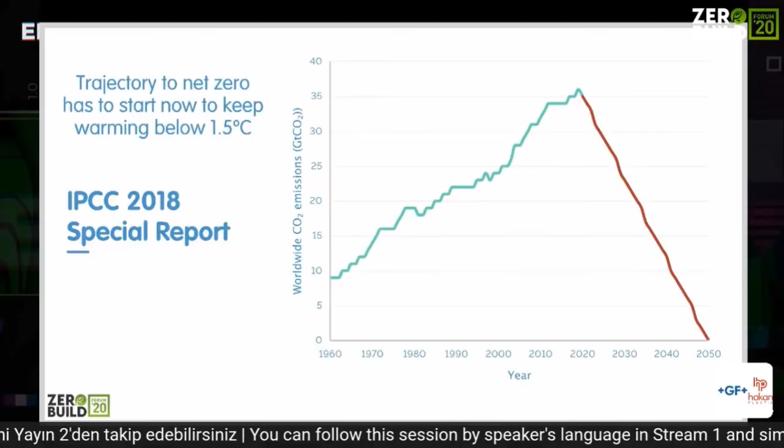So we need to be taking action right now to reduce emissions, rather than planning for things that might happen in 5 or 10 years' time and might help us reduce. We need to be reducing now, and we need to do what we know now is going to work. So that's my key takeaway from that graph.

I also wanted to point out that emissions from buildings generally fall into 2 broad categories: either operational emissions or embodied emissions. I'm sure most people are familiar with this, but just to clarify, the embodied emissions happen at the construction stage of the building, and also at certain points with maintenance and repair cycles during the lifetime of the building, and at the end. So on this chart there, the blue areas.

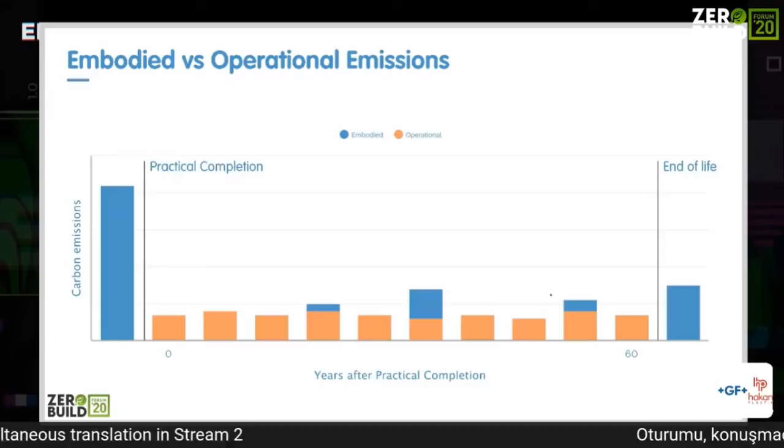Whereas the operational emissions occur during the lifetime of the building, and they're the emissions associated with heating, hot water, electricity use, etc. Today I'm going to be talking predominantly about operational emissions, because that's what Passivhaus focuses on, and that's also traditionally been the largest part of our emissions from buildings. But that's not to say that embodied emissions aren't also extremely important, because we need to get both down to zero if we're going to get to net zero.

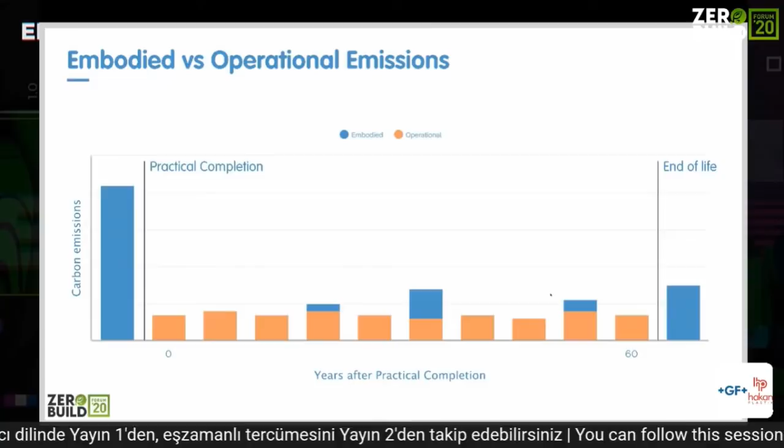And as we reduce our operational emissions, embodied becomes more important. But they are complementary. You can do them both. One doesn't necessarily impact the other, and they need different types of consideration. So today I'll be talking about operational emissions.

So how do buildings fit into the overall picture? Buildings account for nearly 40% of the world's emissions. And then you can see there that worldwide, the biggest chunk of that is in operational energy or operational emissions. So if we can deal with part of that, then we've done our bit to get to net zero.

And I just wanted to put this up. You probably won't be able to read the detail, but this is very similar to the UK's pattern, and it's just to emphasize that there are mostly fossil fuel sources used in Turkey. And then if you trace those through, you can see the oil products, the gas and the electricity products. If you trace them through to the residential section down here, you can see that the majority of the energy used in Turkish residential buildings uses gas, oil and electricity as the energy sources.

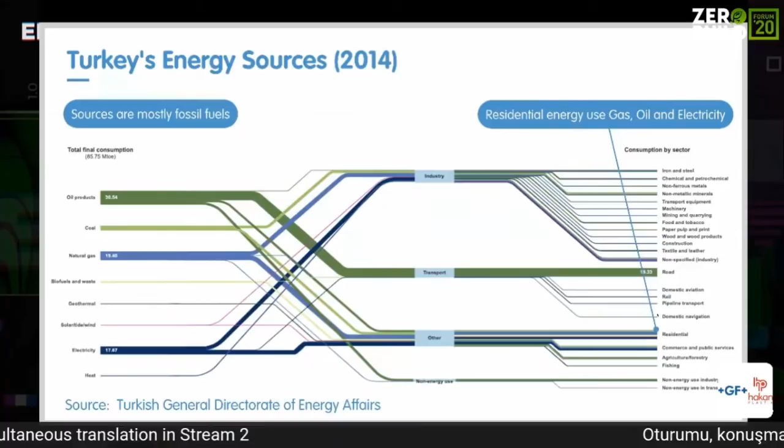And similar to the UK, gas and oil are used for heating and hot water due to the fact that they're very efficient for doing that. But that's the challenge we've got to start with. The mix of energy that we've got right now, both in the UK and in Turkey, is sourced from a lot of fossil fuels. So that is the big picture.

Now I'd like to spend just a few minutes talking about Passivhaus itself. Some of you may have heard of it, some not. And there are also maybe some misconceptions because people think that Passivhaus is something that perhaps it's not. So what is Passivhaus? Well, I'm going to talk about all these different sections: the energy balance in a building, the criteria that are associated with Passivhaus, what Passivhaus does for health and comfort, quality assurance, and how much it costs. So let's start with energy balance.

And this is a very simple but very powerful analogy. So if you have got a traditional coffee pot, which sits on a hot plate, then that will keep your coffee at the right temperature. But it is constantly pumping energy through that coffee pot to do that. So it's using a lot of energy. If you've got a very well insulated flask, that will also keep your coffee at the right temperature, but it's using no energy at all, or very little energy in some cases.

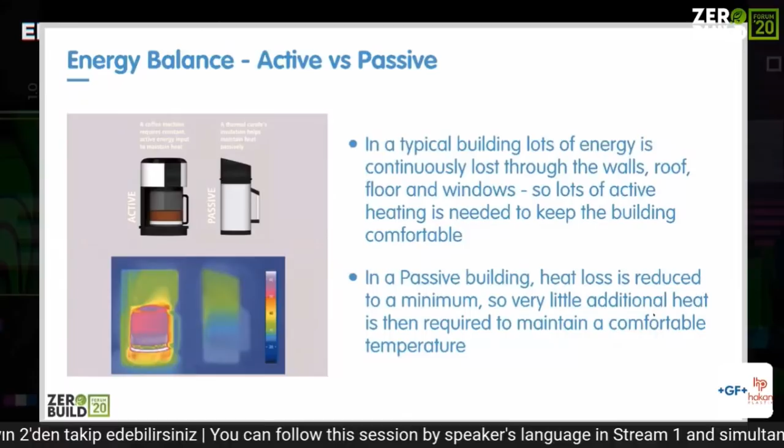So that is basically the principle of a Passivhaus. You put the energy in and keep the energy in rather than let the energy leak out. And of course, that is done in the main by improving the fabric, improving the bits of your building that are in contact with the outside world.

In a typical UK home, and I couldn't find directly equivalent data for Turkey, but I think it's probably quite similar. You can see that on the left-hand side of the screen here, you've got the ways that we can lose energy through a building. So through the roof, through ventilation, through windows and doors, through walls. So that's the way we can lose energy.

On the other side, we've got ways we can gain energy. So we can gain energy through windows, through the solar gain, and internal gains. And those are what we do by living in the house, cooking, washing, and just our metabolic rates within the building. And then you can see that this large pinkish bit here is the gap, effectively. These two columns have to balance.

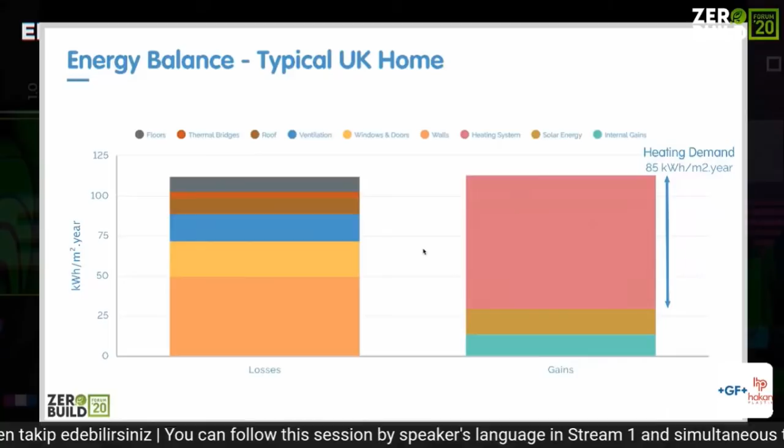And if they don't balance, if this one, the gains, is smaller than the losses, then your building will start to cool down. It will start to get cold. So the pink area is how much we need our heating system to deliver. And you can see here that for the UK, that gap for a new build home is around about 85 kilowatt hours per meter squared per year.

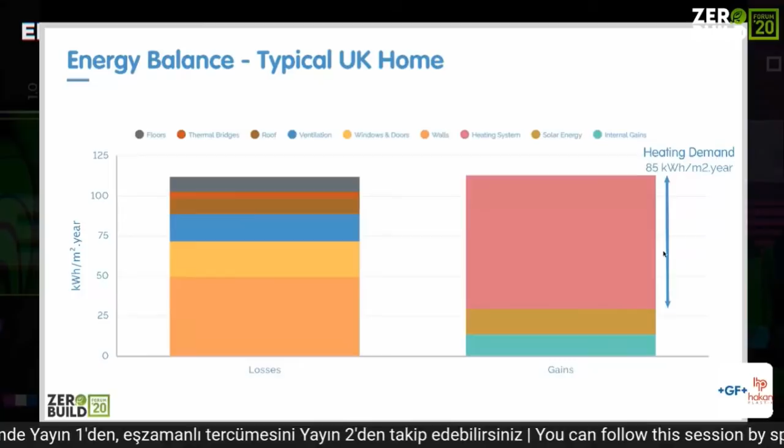It's probably worth me just explaining. I'm sure most of you will be very familiar with kilowatts and kilowatt hours, but there might be some who aren't, and I'm going to use these phrases a lot during the presentation. So it's all about energy and power. So if we start off with power, it's measured in watts or kilowatts or terawatts. And it's an instantaneous measurement.

So if you think of it like water, it's the rate at which water is flowing through a tap or a hose pipe or something. So that's power, and you measure it, and then the next second it might change, and it might change again. So I might have a light bulb, which is 100 watts. And so that means instantaneously it's putting out 100 watts of energy in the form of light and heat.

Watt hours or kilowatt hours or terawatt hours is energy. And what that is, is power but with a time function, which means if I left my 100-watt light bulb on for 1 hour, that would be 100 watt hours. If I had a 1 kilowatt kettle and I left it on for an hour, it's 1 kilowatt hour. So it's a measure of an amount of energy.

So if I go back to water, power is the rate of flow of water. Energy is how much water you might have in a bucket or a glass. So kilowatts and kilowatt hours are power and energy. So what we've measured here is the amount of energy over the course of a year, and we also tend to measure it per meter squared of a building. And what that means is we can compare different sizes of buildings.

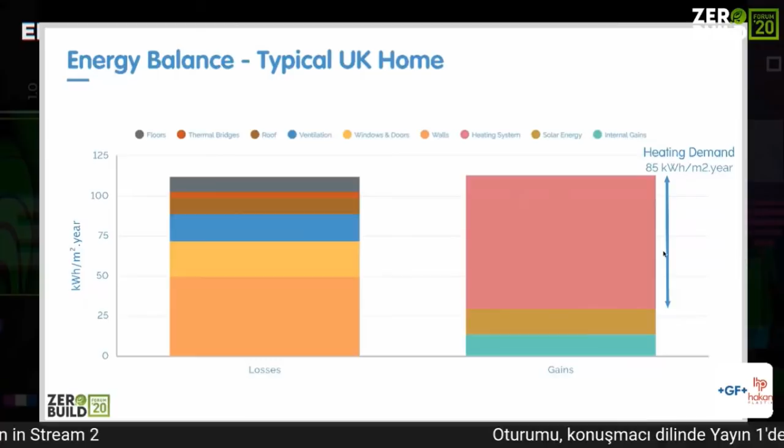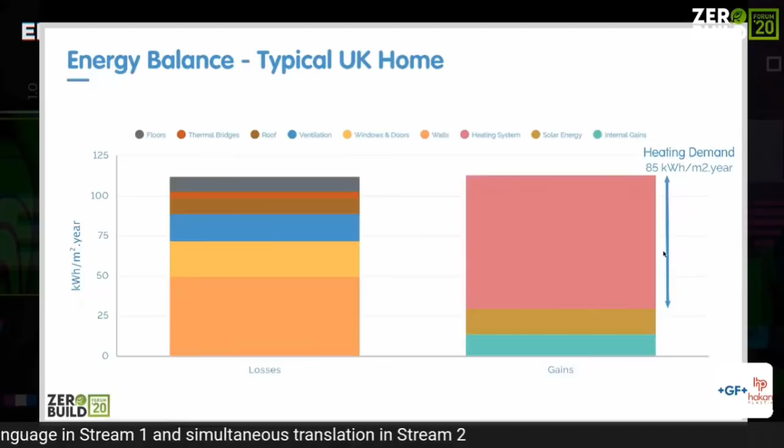So a small building and a large building, very difficult to compare the amount of energy they use overall, because the bigger one obviously will use more. But if we reduce it to per meter squared of the building, then we can compare all different types of buildings and different sizes of buildings. So in the UK, around 85 is what our new build systems have to deliver. Existing buildings, the buildings that are already built, it'll be a lot more.

So what does Passivhaus do? Well, Passivhaus comes along and really focuses on that left-hand side of the chart, on all our losses. What it does is it squashes those down. So more insulation, better ventilation, better windows, no thermal bridges. I'll explain those in a moment. So that really gets squashed down.

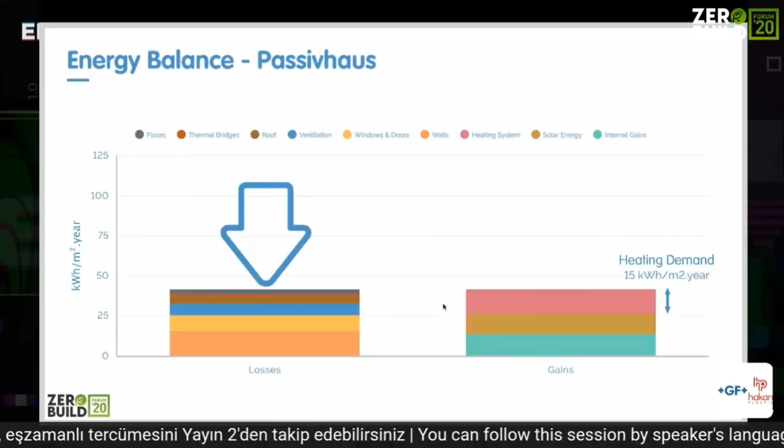And on the other side, what happens is the solar gains and the internal gains stay roughly the same, which means that this small bit now is all the heating system has to do. And that comes down to 15. And that 15 number is the specific Passivhaus criteria that has to be met for that building to be known or certified as a Passivhaus.

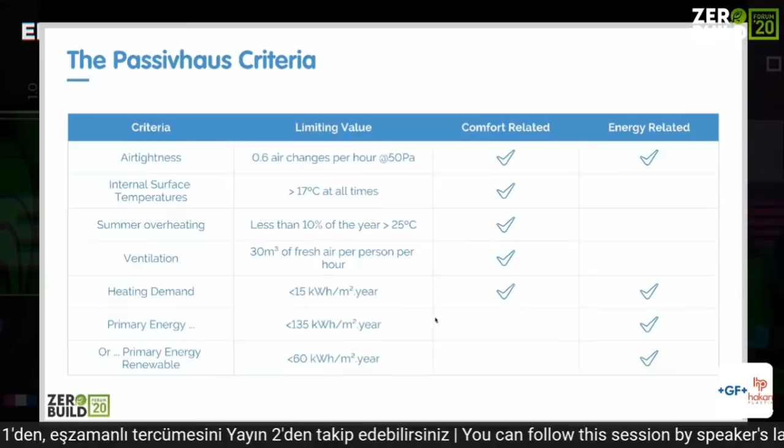So that's really, in a nutshell, what Passivhaus does. It makes the fabric better to reduce your heating demand. But it does some other things as well. And I wanted to put this slide up just to show the fact that Passivhaus is not just about energy.

We spoke just now about the magic number of 15, and you can see that is indeed related to energy, but it's also related to comfort, because it's very nice to have a warm, comfortable home without lots of drafts and variations in temperature. And you can see there are other criteria there, which are, again, not just energy related, but focused on comfort.

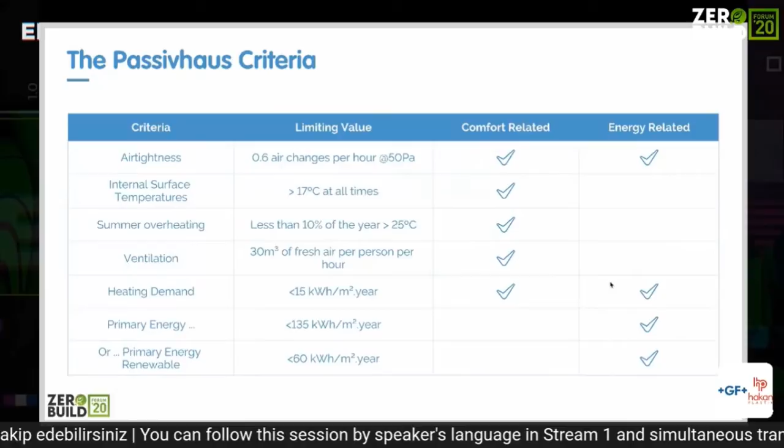This is one of the big misconceptions of Passivhaus, that it's just about energy. Actually, it really focuses on comfort as well. So air tightness helps with energy, but it also means there are no cold drafts. Our surface temperatures above 17 mean we don't get condensation and mold in our house, so it improves air quality. Summer overheating less than 10% means we've got nice temperate buildings all year round, etc. So you can see it's not just about energy.

If we translate that into what it's like to live in this kind of building, on the left-hand side we've got those Passivhaus criteria, what we're specifying right at the beginning. That leads to these effects. I already mentioned condensation and mold. The air quality is very good because all the air is filtered and coming into the building in a controlled way. The result is warm, comfortable buildings with healthy indoor air quality, which are comfortable in the summer.

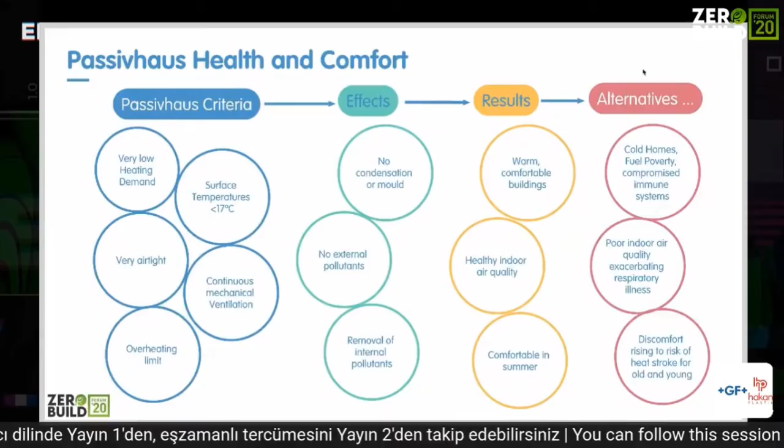That might sound great, and we might think we are already building buildings like that. But actually the alternatives, cold homes, homes that overheat, and homes with poor air quality, already exist. Certainly in the UK, some of the homes being built as new homes still suffer from these problems, particularly overheating. So this isn't something we've already solved.

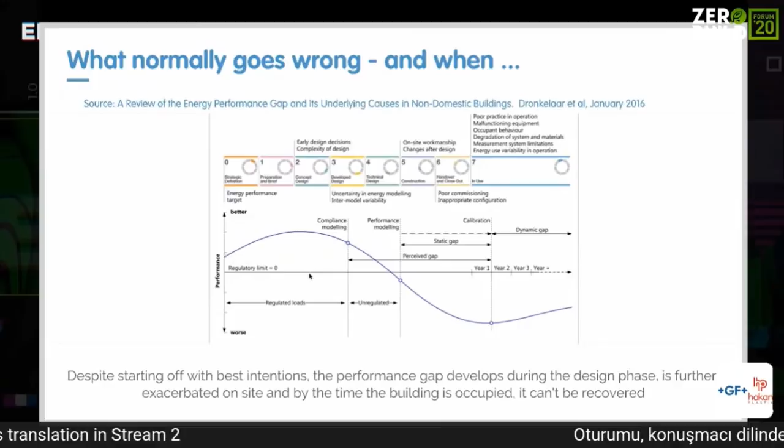Many people think the performance gap always occurs on the building site, that when you entrust the design to your builder, they get it wrong, and that's why buildings don't perform. But actually what this shows is that the gap starts to happen at design stage. The x-axis, the zero axis here, is where we hit the regulatory limit, so that's what we have to be above.

We start off well above it, but when we get into stage 3 and 4 of the design and construction process, doing developed design, technical design, things tend to get quite difficult, and we're making trade-offs and compromises. At that point people aren't necessarily looking at energy, they're often looking at cost or other elements, and what that means is that almost inadvertently the performance of the building starts to dip, and by the time we get to site we're already below the line.

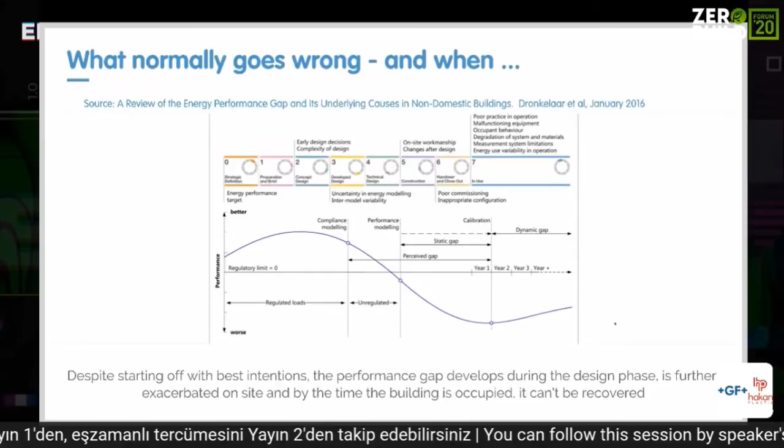We then get on site, and then things do happen. Things perhaps aren't built correctly to the specification, different materials are substituted, and we carry on dipping in performance until by the time the building is occupied, it's well below what we expected it to be, and that is the performance gap. I found that quite interesting, and it's interesting to map that against what Passivhaus does.

Passivhaus has these criteria I've spoken about, but it also has a built-in quality assurance process. That means correctly qualified people, designers, certifiers and tradespeople, are involved step by step. At the beginning, in stage 1 and 2, you've got a Passivhaus designer on board. They may well be your best friend on the design team, because they're telling you that yes, you've met the criteria and your building is going to be a Passivhaus building.

Down here in technical design, they're your worst nightmare, because in that case they're saying no, you can't do that, or it won't be a Passivhaus. That's what stops the performance gap. It stops people inadvertently changing things which compromise the energy performance. The net result of that quality assurance process throughout the Passivhaus project means that we don't have a performance gap on average in Passivhaus buildings. This is a very famous chart in the Passivhaus community, and it shows here on the right-hand side three Passivhaus developments.

You can see in each chart the red line and the black line: one is the calculated space heating demand, and the other is the average of the actual measured space heating demand. You can see that they're right on top of each other. Some buildings vary more than others, so there is a distribution, but on average, the space heating demand in a population of Passivhaus buildings is exactly as the design says it would be. So there is no performance gap, and that's really important.

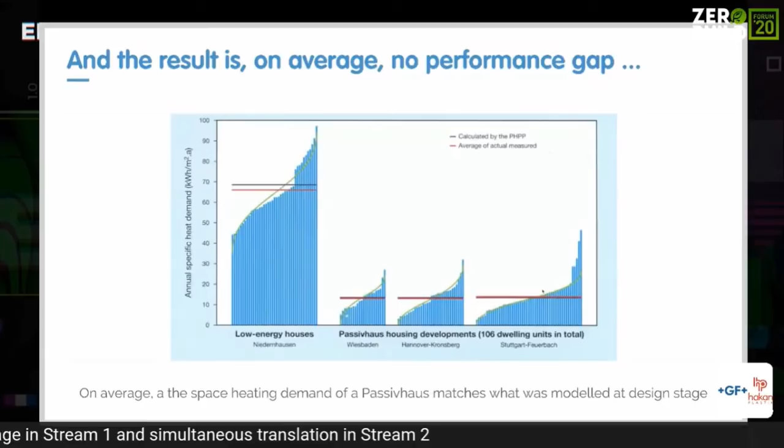In the UK, that's a great problem for us, the performance gap. You can set as many standards as you want, but if you don't fix the performance gap as well, then what you're building will still use more energy and you won't get to net zero.

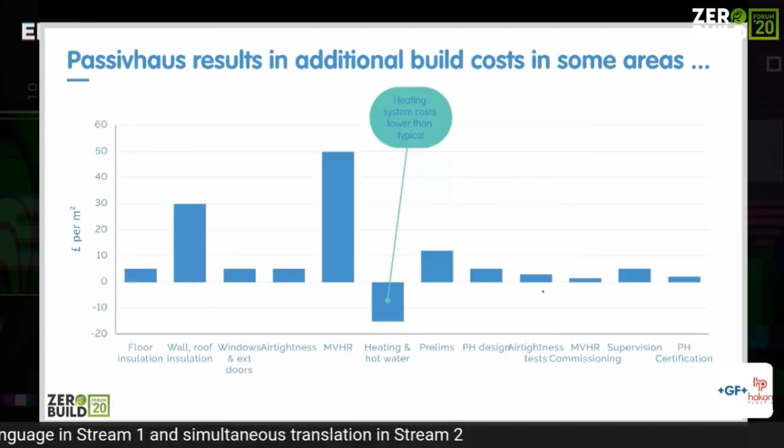Does it cost more? Well, it can do, I guess, is the answer. This chart shows the extra-over and under costs of various elements of a Passivhaus project. You can see there's a little bit more generally in insulation, and there's a chunk in the MVHR, the mechanical ventilation heat recovery. There's normally a saving in heating hot water because there's less of that needed in the building. I'd argue a little with MVHR being counted as an extra Passivhaus cost, because what MVHR delivers is your ventilation and fresh air quality. Is that something you'd expect not to pay for, when you don't really get it in a normal building? So overall, fairly containable costs.

Looking at where we've come from in the UK, our pioneer projects were quite expensive—we didn't really know what this required. But by 2018 we were down to 8%, with a projection of 4%. A report that came out last week put current costs at around 5.3% for this kind of building. But some people have built for less than that, or cost neutral. What they say is that Passivhaus forces you to build simply and robustly, and that saves you money on what you would have built otherwise, which can make it a cost neutral exercise.

And of course, that's just build costs. If you take into account the lifetime costs, then you will always generate a positive result.

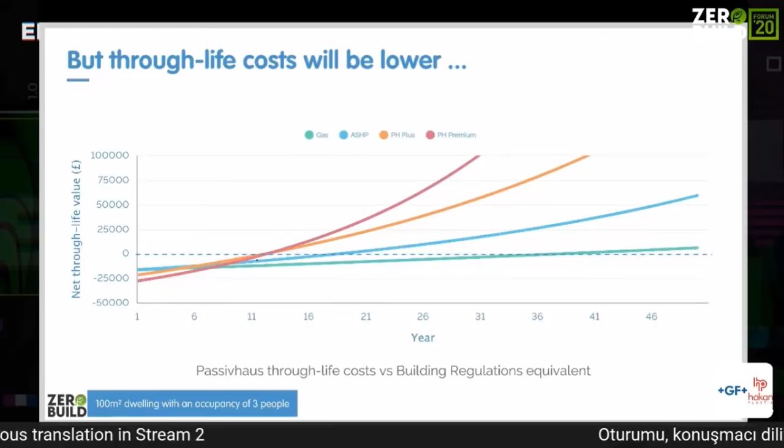Here we're showing different kinds of Passivhaus with different heat sources: a gas boiler, an air source heat pump for electricity, and a Passive House Plus or Premium building, which are two different elements in the Passive House standard. You can see there's an extra cost to start with, so you're below what you would otherwise have paid, in the negative. But as you use the building, your savings on energy and also maintenance result in the comparison coming back up. So within about 11 years in two cases, and 16 years in the other, you'll be above the line, and then in a better financial situation over the lifetime of the building.

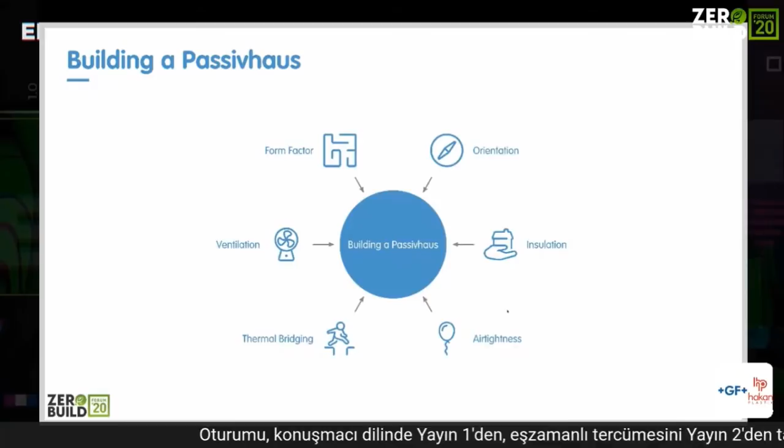So those are some of the defining principles of a passive house. I now want to look at what it takes to build one. We'll talk about form factor, orientation, insulation, air tightness, thermal bridging, and ventilation.

Form factor actually has nothing to do with passive house in a way, but it makes passive house much easier. Form factor is a single number: it's a ratio of the external heat loss area to your internal livable floor area, one divided by the other.

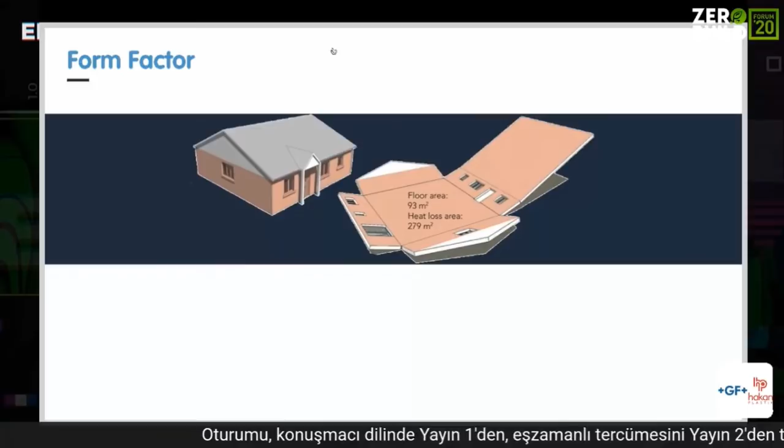For this building, the floor area is 93 square meters and the heat loss area is 279 to 280 square meters. The heat loss area is all the parts of the building in contact with the outside world, through which in the winter season we lose heat. This other building has exactly the same floor area, 93 square meters, but only 74 square meters of heat loss area—so it's four times less.

Yes, the top flat will have a roof area, the bottom flat will have a floor area, but overall, every unit in that building will have a lower heat loss area than if it was built equivalently as a standalone building. What that means is before you even start thinking about insulation and energy performance, your job is four times easier—four times thinner insulation to get the same amount of heat loss, because you've got four times less heat loss area.

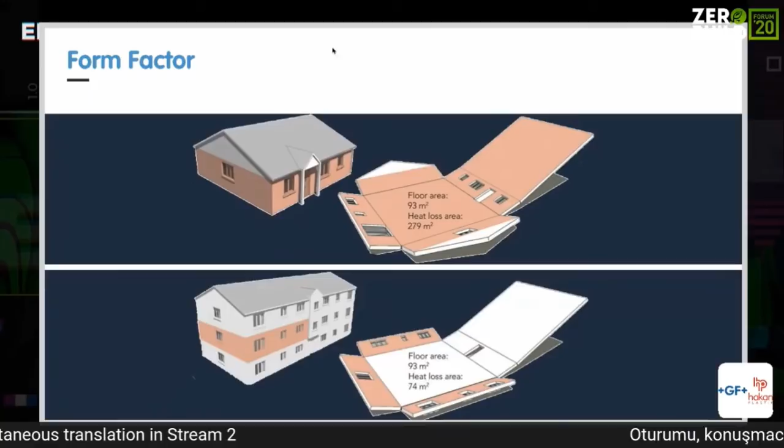So that's purely efficiency of shape. If your form factor is good—and in the UK generally we can get anything around the number 2.5 form factor and below—it's relatively straightforward to achieve passive house. If we get above that, it starts to get more difficult, more costly, and that's not where we want to go. We want to start with an efficient building.

Next, orientation. This isn't just orientation of the building—in fact the building itself can point any way you want. It's more the glazing, more where your windows are pointing.

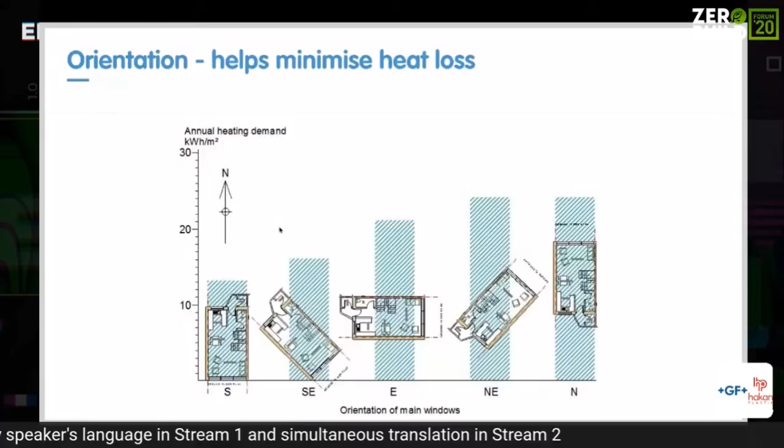That's not really anything to do with passive house, but if you get that right to start with—the optimum amount of glazing in the right orientation—it makes everything else easier later on.

The other thing about orientation is it also helps us deal with summer overheating, which in a changing climate is an increasing issue for us all to consider.

What you can see here is the amount of solar energy getting through onto the surface of this window. For the south-facing window, when this window and the overhang face south, in the summer case only 20% of the sun's energy is getting through, whereas in the winter case over 60% is getting through.

So that's exactly what we want. We want, in the cooler parts of the year, assistance from the sun to keep our buildings warm, and in summer, when there's too much energy, we want to keep that out. So you can see that when it's facing south, this shading works very well.

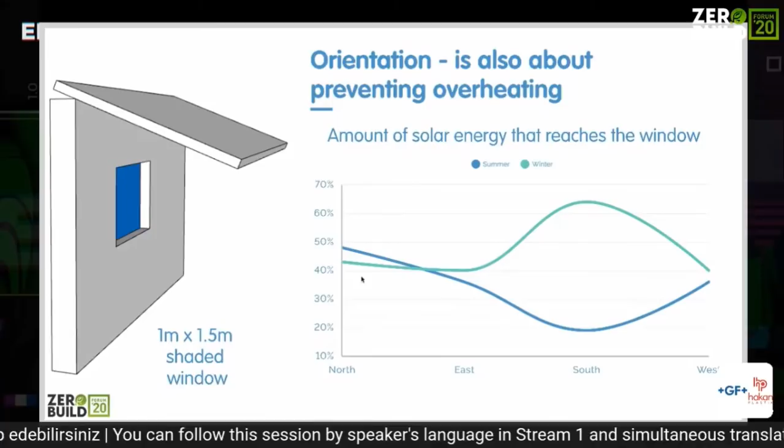When we move to east or west, you can see it's almost the same—the shading isn't working as effectively because the sun comes around low. That gives us a problem. So orientation is really important, and it's good to get your glazing and shading in the right place, which again makes our job easier.

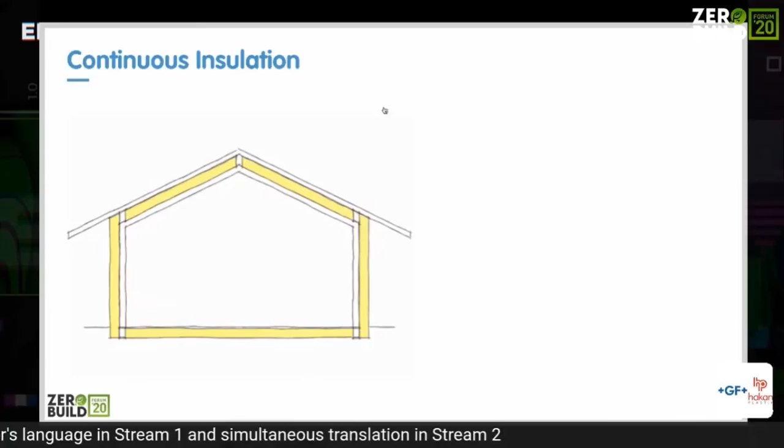Now I want to talk about the principles of Passivhaus itself. The first one might sound obvious, but it's continuous insulation—all around the building, all those elements in contact with the outside air or outside ground. In the UK climate that's typically around 500 millimeters for the whole structure of the wall, including the insulation.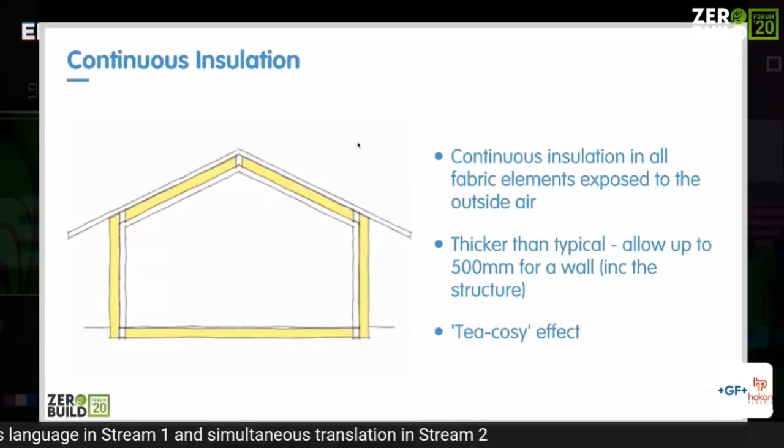But you can see there are some small gaps there, and those are thermal bridges. Those occur typically where the structure passes through the insulation layer, and in a normal house it doesn't give us much of an issue—but in a Passivhaus it can add up and have a major effect.

So we need to get rid of those, and the way we tend to do that is by designing them out—clever design, intelligent design, in some cases specialist materials, but they can be done very inexpensively. They can be designed out.

Next, glazing. We have a couple of reasons why we use triple glazing in Passivhauses in the UK. The first is to keep as much as possible of the heat in, so they're much better than double glazing or single glazing for keeping heat in the building.

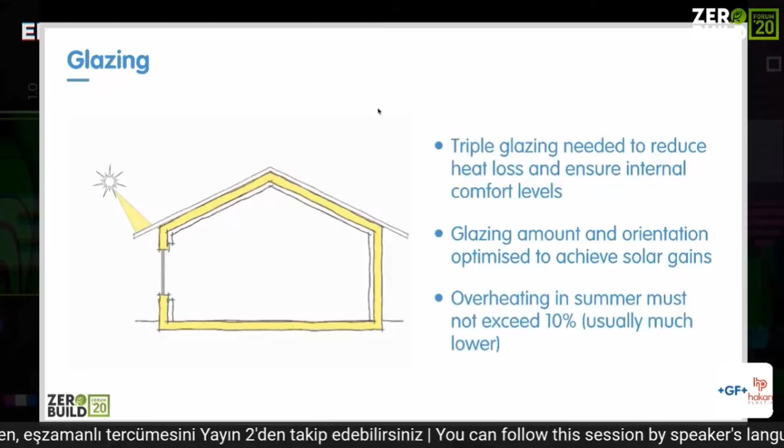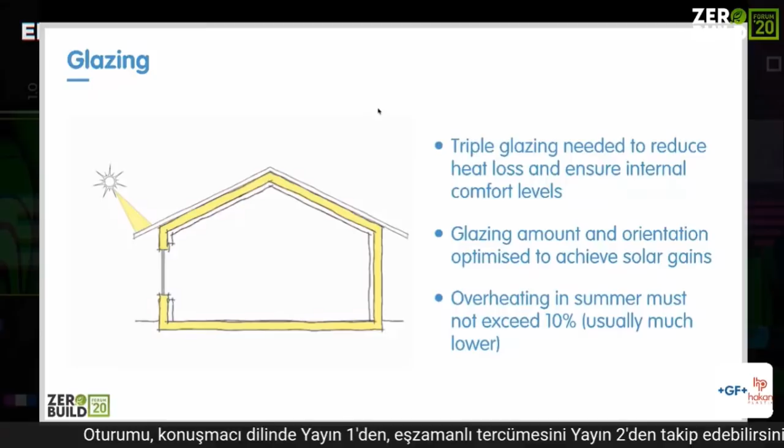It also means that the surface temperature of that glass is 17 degrees or more all year round, which means we don't feel cold when sitting next to a window. If we were sitting next to a double glazed window in winter, which might be 12 degrees, we'd feel cold, even though the room temperature may be fine, because we're feeling that surface temperature from the window. So triple glazing addresses that, and also the shading.

Next, air tightness. I mentioned earlier that Passivhaus buildings are airtight as one of the criteria. They are very airtight, about 10 times more than a typical building. What that does is keep all our warm air in, which is great from an energy point of view, but it also prevents cold drafts coming in and making us feel uncomfortable. And then finally, we've made our building very airtight, which means that needs to be sorted out in terms of our ventilation.

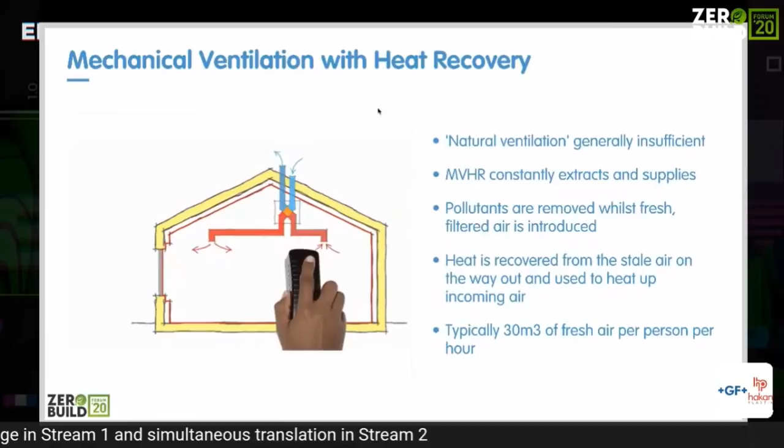So we put in a mechanical ventilation and heat recovery system, which is constantly extracting our warm but perhaps stale, humid or smelly air out of the building, passing it over a heat exchanger with cool air coming from outside, using that air to heat the building. In summer, it reverses — you've got warmer air outside and cooler air inside. It works in the same way; the heat exchanger just does the same job.

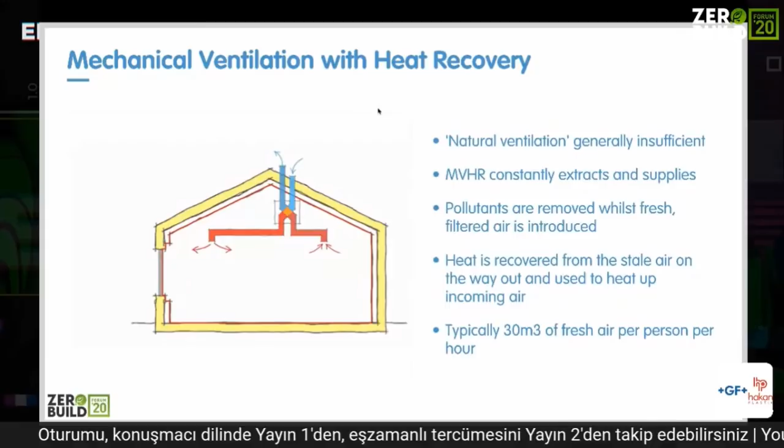What this means is that without losing energy, either cool air or warm air, we are maintaining a constant flow of fresh, clean, filtered air into our building. This is one of the significant points which is improving people's health and comfort in buildings. I was listening just yesterday to people saying that their children who have asthma move to a Passivhaus, and their asthma sort of clears up, disappears.

So that's a little bit about Passivhaus. What I'm now going to do is talk more about the bigger picture and what it might take us to get to net zero.

As I said earlier, if we are trying to get to net zero, then it makes sense to understand where we are right now. So this is a little waterfall diagram which explains the various ways in which we use energy in a residential domestic building. We start off with our heating, usually the biggest chunk, and I mentioned it earlier, the performance gap.

We can't ignore it, and in the UK we think it's about 60% of our heating demand. So we model at 54 kilowatt hours per meter squared per year — that's a typical average building when it comes out of design. When it's in use and you measure it, it turns out it's 60% more energy use, so that takes us up to 86.

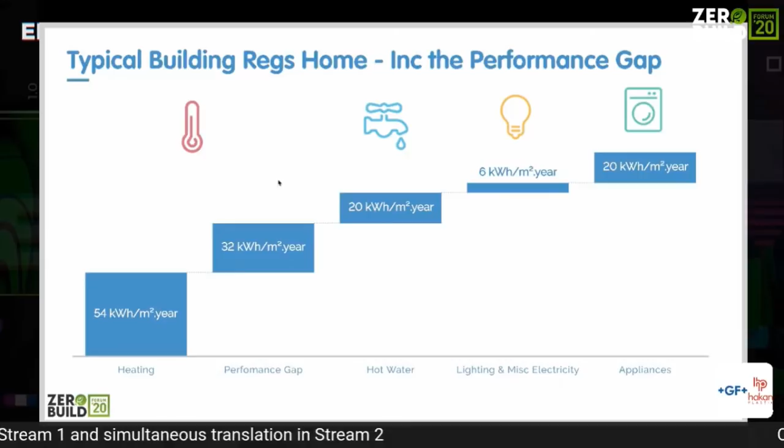Next is hot water, then lighting, pumps and fans, and some minor things. And then finally, appliances — anything that we plug in, washing machines, fridges, that kind of thing. So that's really how we can break it down, and that's the proportion we seem to be at the moment.

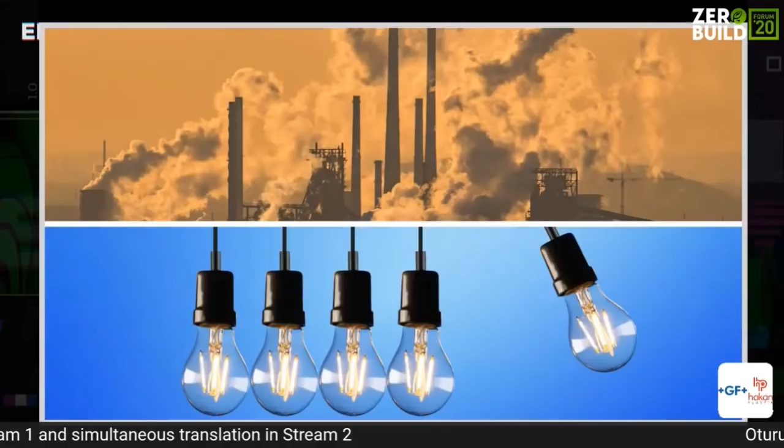I'd now like to pose you a question: if we are thinking about how we set our targets for the future for buildings, should we be talking about carbon, setting targets in terms of carbon, or should we be talking about energy? I wonder what your personal thoughts are on that, because most people will instinctively say carbon because that's what we need to try and reduce and get to zero. But actually, I would suggest that the answer should be energy, and the reason for that is...

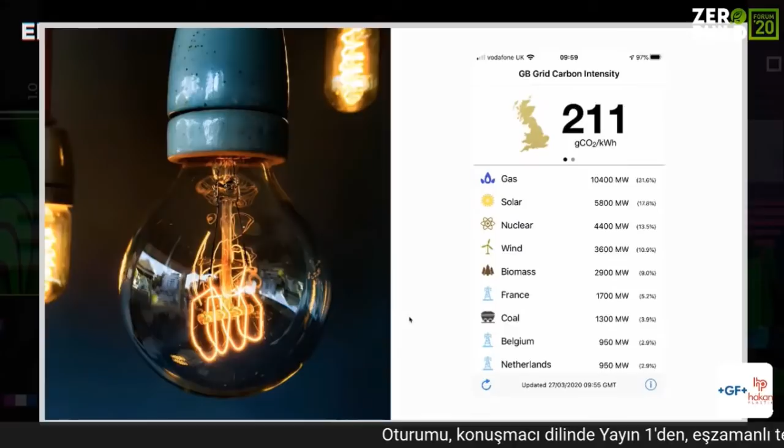And the figure there was 211, so 211 grams of CO2 gets released for every kilowatt hour. So if I left that light bulb, a 1 kilowatt light bulb, on for 1 hour, that's 200 grams of CO2. That would seem pretty straightforward, pretty simple — why not set targets in terms of carbon? Well, the problem is that later on that day, the number was different.

The number changes minute to minute because we've got a different mix going in, particularly from our renewable sources. Wind and solar aren't very reliable, as we can't predict them from week to week. At this point, the sun had gone down, no solar, so my number had gone up.

And what about next week or next year? Do we know what's going to happen in terms of national policy? Is the government going to introduce lots more renewable energy, or perhaps we'll have a new government next year and they won't? So predicting forward to 2050, both short term and long term for carbon, is quite difficult.

In contrast, if we compare that with energy, right now we know with carbon those figures I put up were somewhere between 150 and 298 on that particular day. Energy, it's 1 kilowatt hour. And in 2050, we don't know for carbon, but we do know it will still be 1 kilowatt hour for a light bulb. What that means is that if we set targets in terms of kilowatt hours for energy efficiency...

If we build an energy efficient building now, it will be an energy efficient building in 2050. There was a great example from Vancouver, where a building cited as an exemplar low energy building passed their code with flying colors. A few years later, when their grid had decarbonized, it turned out this building wouldn't have passed building regs because it was using too much fossil fuel, regardless of the actual efficiency—it wasn't very efficient. So picking your targets in terms of carbon has got a number of issues.

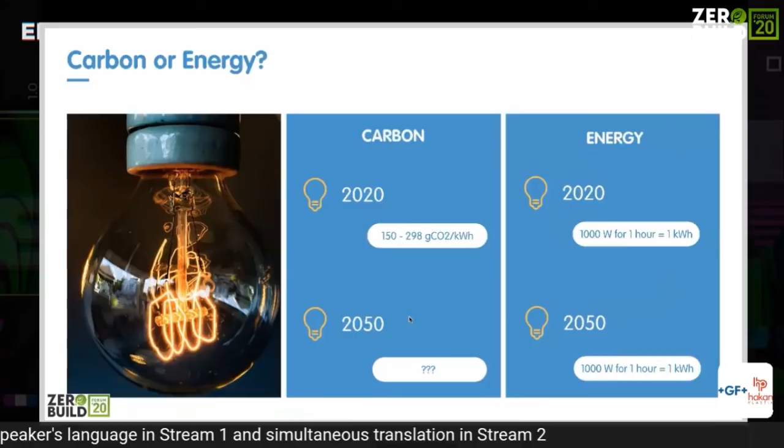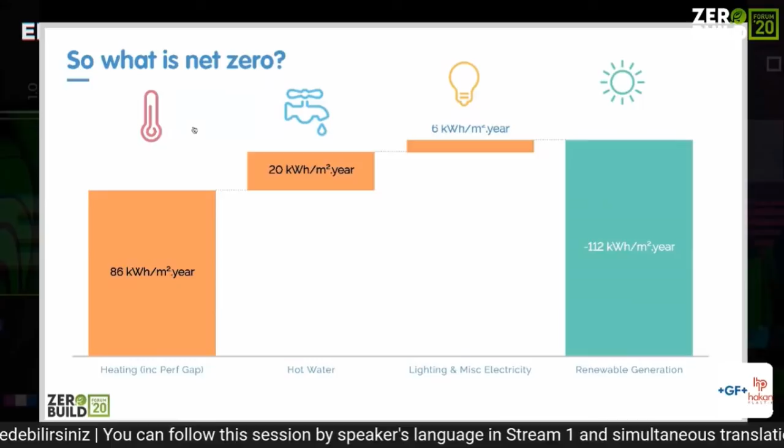So let's now go back to talking about net zero. I explained earlier about the way we use energy in buildings. So if you want to be net zero, we need to offset one with the other—offset generation. If we've got renewable generation from whatever source, that needs to match how much energy we use in the building. But you may notice there's one bit missing here that I talked about earlier, which is those appliance loads.

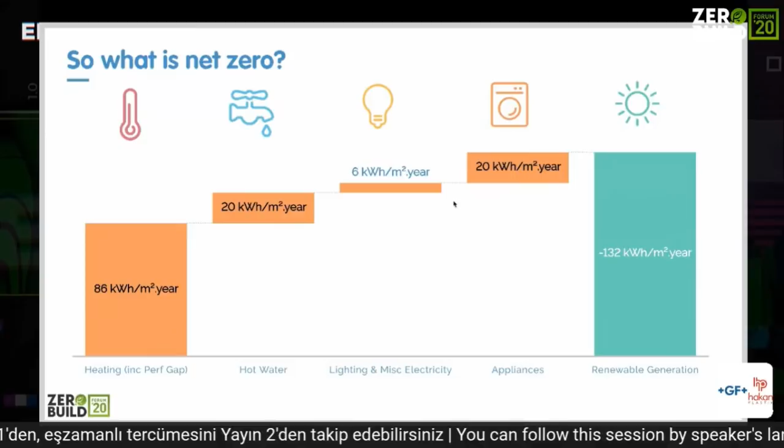Traditionally, appliance loads have been ignored because they are quite difficult to predict. We can model heat use—we kind of know how people like to heat and cool their homes. We can do the same with hot water and lighting, but appliances are more difficult. So it's tended to be ignored because it's so dependent on how people use their buildings. But I would argue that now we're in a net zero world, we can't ignore that.

So we need to bring that into play as well. That means all those elements—heating, hot water, lighting, and appliances—all need to be considered when we work out how much renewable energy we're going to need in the future. So is that it? Is that what I'm showing on the screen now for that typical home? If we generated 132 kilowatt hours per meter squared per year, would that be net zero?

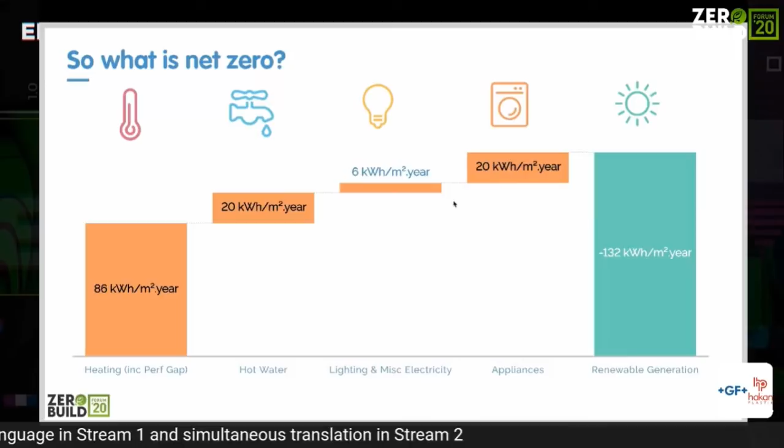Well, the problem is we need to consider something else: what our energy systems might look like in the future. They might look something like this. You can see this is a little similar to the diagram I put up at the beginning, with sources of energy on the left-hand side and where they go on the right-hand side.

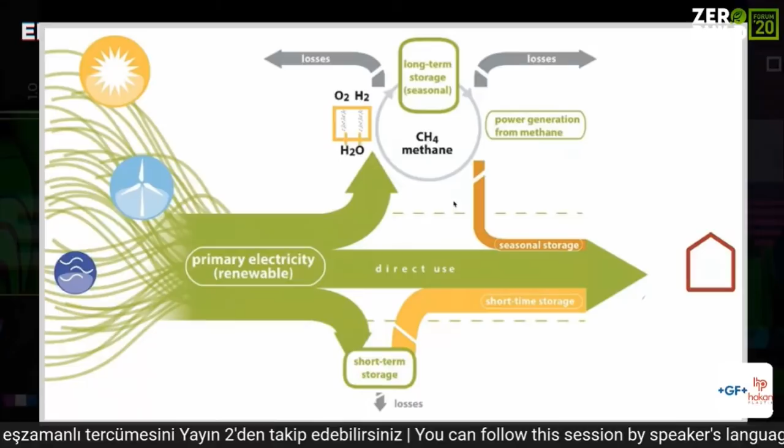In the future, when we are in a net zero world, we are not burning things—we are not burning fossil fuels, not burning things that come out of the ground, because we can't really do that and still be net zero. So what we're doing is generating a lot of renewable energy from a variety of sources—solar, wind, tidal. But the problem is that they are not predictable and reliable. So when there's a national holiday or a great sporting event, we can't guarantee that at the particular moment when everybody wants to make some tea, we have that extra energy available from the wind or the sun.

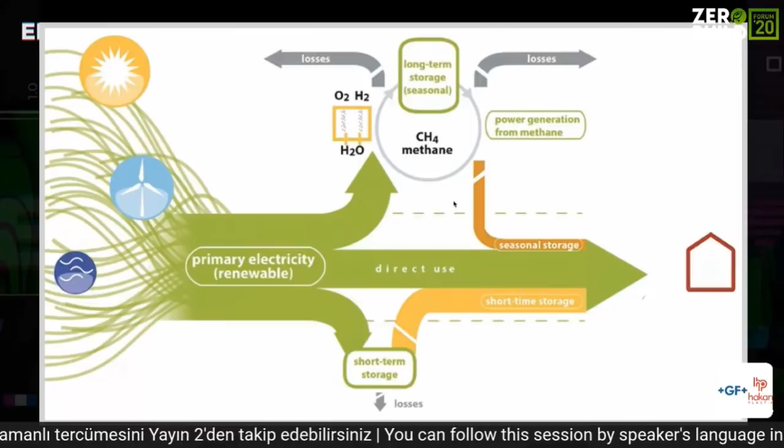So what that means is we have to store our renewable energy. Some of it we will have to store on a daily cycle, so we'll generate during the day and we'll use it in the evening or overnight. Some we might store interseasonally, so we might generate in the summer and use it in the winter. And that presents a problem, because if we store energy, generally we lose energy. We'll lose it in the transmission into storage, we'll lose it during storage, and then getting out again.

And at the moment, we don't quite know how much that's going to be, because we don't know what national grid scale storage technologies are coming along. And we also don't know the characteristics of our future buildings. So how long do we need to store energy for? Have we got very efficient buildings which don't need to store energy for very long, or not? So that makes it quite difficult to predict, but nevertheless, we need to bear it in mind.

So actually, when we're thinking about net zero, we need to consider not only the energy use in the building, but the storage losses associated with that. And what I mean is, if we need 100 kilowatt hours to run a building over the course of a year, then actually we might need to generate 120 kilowatt hours or 130 kilowatt hours in order to take care of those storage losses that are associated with it. So this is a bit of a developing area, but it's definitely part of the net zero discussion.

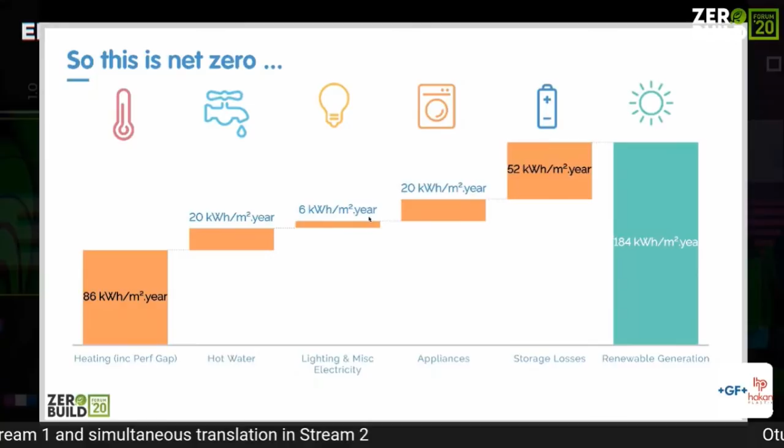So you can see here that my actual net zero definition has become not only what we use in the building, but the storage losses. And if we now generate that total number, 184 kilowatt hours per meter squared per year, then we can consider this building to be net zero. So we have talked about where we are now and what net zero is, my definition of net zero. You may or may not agree with me. We'll perhaps see at the end.

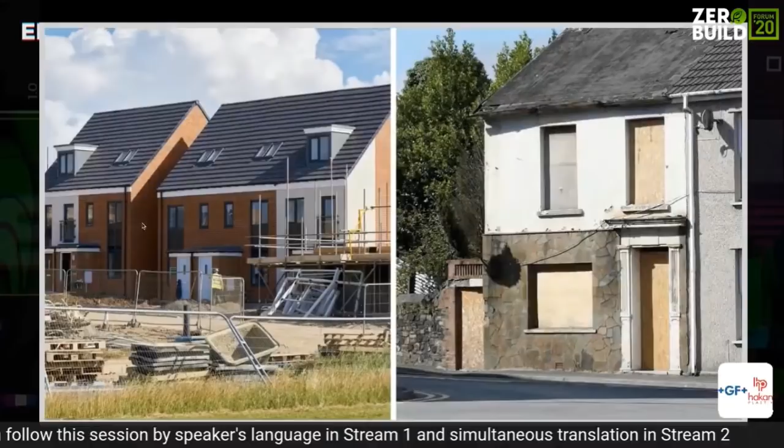So now let's talk a little bit about how we could get there. And it's actually quite difficult. I'd like to talk about this section in two different ways. The first challenge we've got is our new build homes, so new housing stock, and the other is our existing homes. Some of them old and run down like this, but others may be fairly modern, but they probably are still using too much energy. And we need to talk about them in a couple of different ways. So let's think about how we could solve this problem of net zero.

So what we could do is we could just wait for this to happen and have it solved at a national level, which means we don't need to do anything difficult or different with our buildings. Wouldn't that be great? Well, the problem is that it's not quite that simple. This is the equivalent energy flow diagram for the UK. I just want to pick up again on the residential domestic bit there. And you can see that a large chunk of that is coming through from natural gas in the purple at the top. And then a much smaller element of it is electrical in the pink.

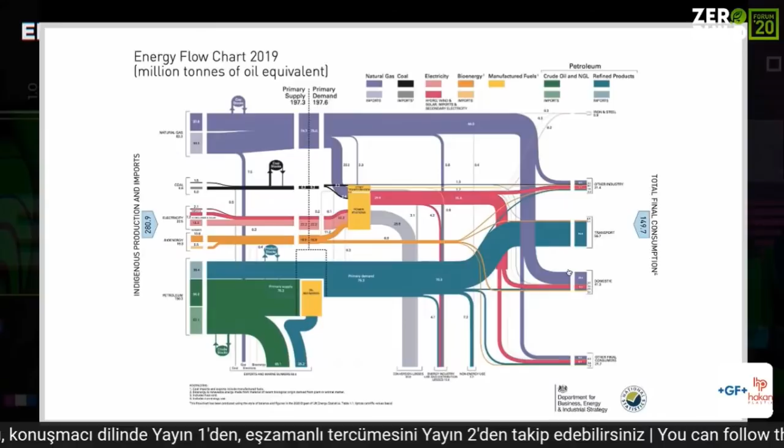And what that means is that there is a huge chunk, and it's 84% of UK homes, and I think it was fairly similar, but not just gas, but oil as well for Turkey, that are heated and have hot water provided by natural gas. And the problem is we can wait for as long as we want for the electricity grid to decarbonize, but that's not going to affect gas. And gas will still be pumping out lots of fossil fuel emissions.

Well, there are a few problems with this, and the first one concerns peak load. So we're back into talking about power, instantaneous power in watts or gigawatts in this case. And this is a UK example, but it illustrates it very well. If we added 15 kilowatts of extra electricity load for every house in the UK, so we're now saying that we've taken out our gas boiler, so we need to provide our heating and hot water by an electrical system. And we're going to say that's going to use 15 kilowatts of energy.

If we did that in every house in the UK, and if they all came on at roughly the same time in the morning on a cold winter's day, that would add 125 gigawatts to the load of the national grid at that point in time. Right now, in 2020, the entire capacity of the national grid is only 100 gigawatts. So that shows you that just switching all our domestic heating over to electrical in one swoop just isn't possible with the current capacity of the grid.

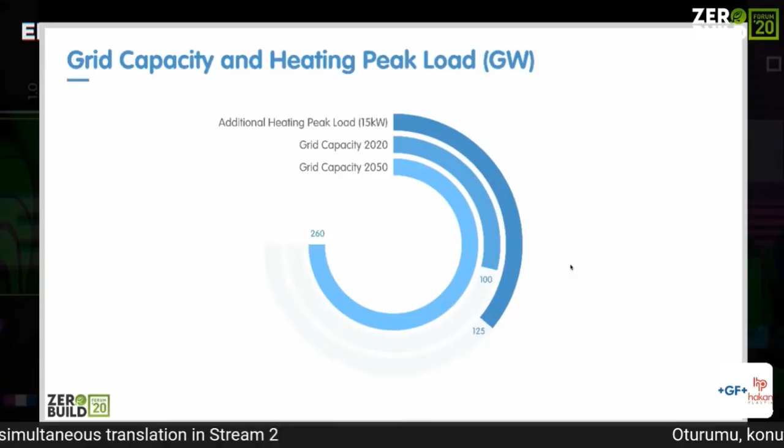And even in 2050, where our grid is scoped to increase quite significantly, it's still too big a chunk, because that 2050 figure is where everybody, all the other sectors, are also needing to draw on this clean energy from our electricity grid. So transportation, aviation, all our industry, commerce, that will be needing to draw its energy from there as well. So it's just not feasible to switch everything from fossil fuel to electricity without some other changes.

So the other thing we could do is we could just throw more renewables at the problem. Just say, right, okay, that's fine. We're going to build more and more wind turbines. We're going to put more and more solar out there. And perhaps we can try some tidal, whatever it might be. Well, is that the right answer?

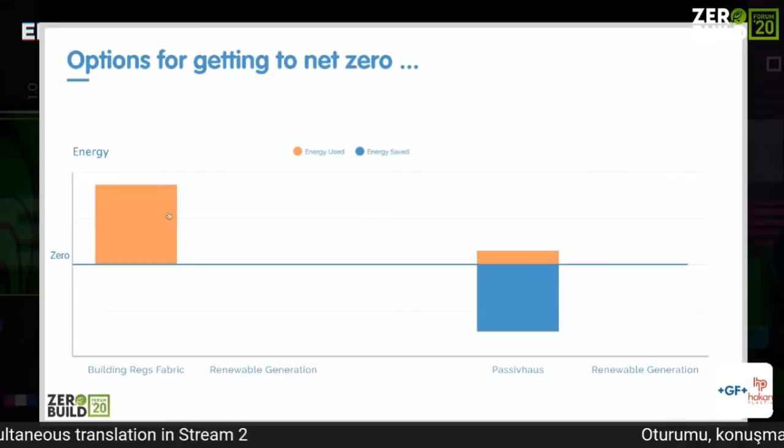So if you're trying to get to zero, you have a couple of options. You can carry on using a large amount of energy, which is, to be honest, what we all do at the moment. Or you can invest in your energy efficiency and use far less energy. But you have invested quite a lot in order to make that building energy efficient in the first place.

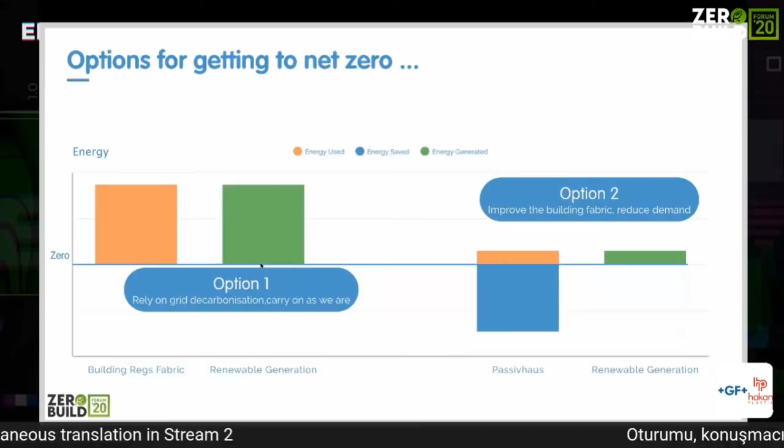So for those two options, when you come to trying to make those two buildings net zero, for the first option, you have to generate a lot of renewable energy. For the second, you only have to generate a small amount. So both those options are viable. They will both work. But how does that look from a financial point of view?

Well, the thing about energy efficiency is that when you invest in that, you're investing in the fabric of the building right at the start of the building's lifetime. So if you're putting more insulation and better quality fabric in right at the start, that's going to be there for the next 40, 50, 60, 80 years, perhaps, the lifetime of that building. And it's going to be working for you the whole time. And you've paid for that once.

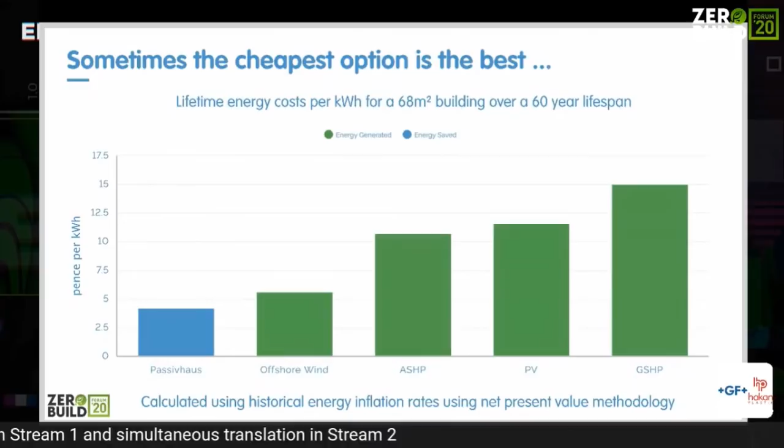However, if you have to generate the same amount of energy, then that will come from offshore wind, air source heat pumps, photovoltaic, ground source heat pumps. They all have a lifetime of around 20 years. And what that means is you have to replace them 2, 3, 4 times perhaps during the lifetime of the building. And that will generate additional costs. So what this chart is showing is that it actually costs less to save energy at the start than generate it all the way through the lifetime of the building.

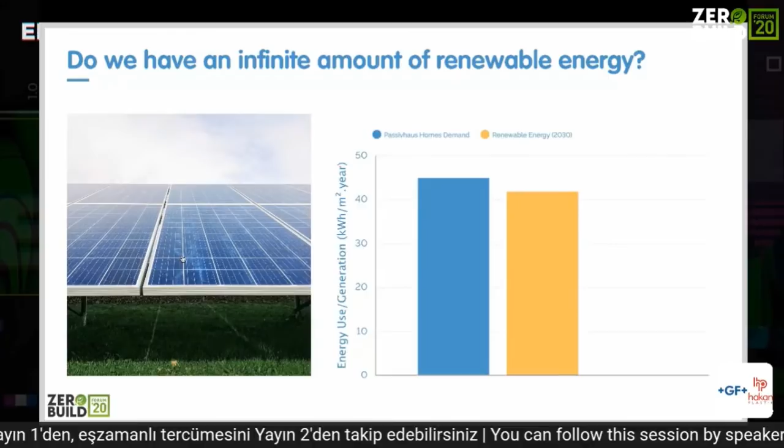And in 2050, it's going to be a little bit higher than that. So this is really quite interesting, because what this is saying is that even if every home in the UK was Passivhaus, on current projections, we wouldn't quite have enough renewable energy to make the overall equation, or the overall sum, zero energy in either 2030 or 2050. And of course, that's every home. That's not just the new homes we're building, that's the existing homes as well.

And, you know, enthusiastic as I am about Passivhaus, the chances of us being able to get every existing home to Passivhaus levels is pretty slim. So what this tells us is that it's difficult. And at the moment, our projections are showing that we don't have enough renewable energy in the future, not even close, to get our buildings down to net zero.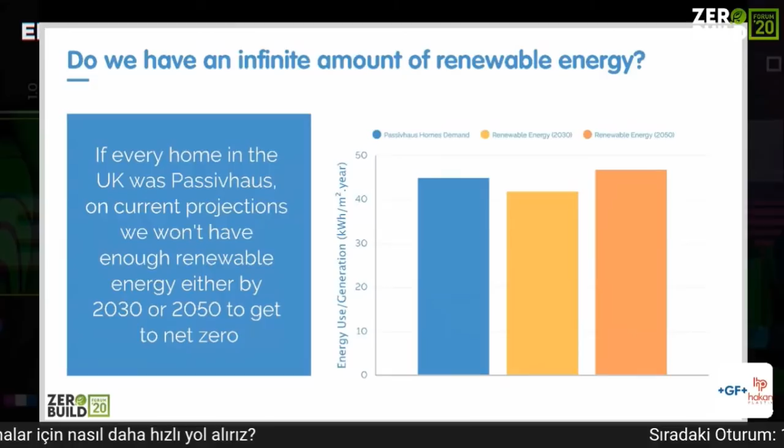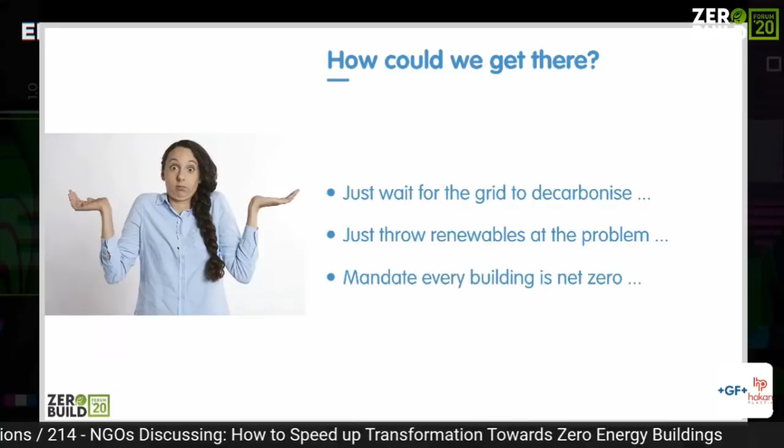So we've had a couple of options. Throw renewables at the problem. We can wait for the grid to decarbonize. The other option perhaps is we could just introduce legislation. We could just say that we would like to mandate every building to be net zero, force people to build net zero buildings. Now that would seem like a really good idea, wouldn't it? Because that takes the problem down to the design and the builder level, and that pushes it down to make everyone behave well. Well, I would suggest that the answer there is that's not right.

And this is why. So what I've done on this chart is I've taken what we were dealing with before, which was kilowatt hours per meter squared per year, and I've multiplied it by the actual area of a building, a 68 meter squared building. So this is now actual energy, kilowatt hours per year. And you can see that for our Passivhaus, and these are everything I've been talking about so far, heating, hot water, lighting, and unregulated energy and storage losses, that adds up to just under 4,000 kilowatt hours in a year.

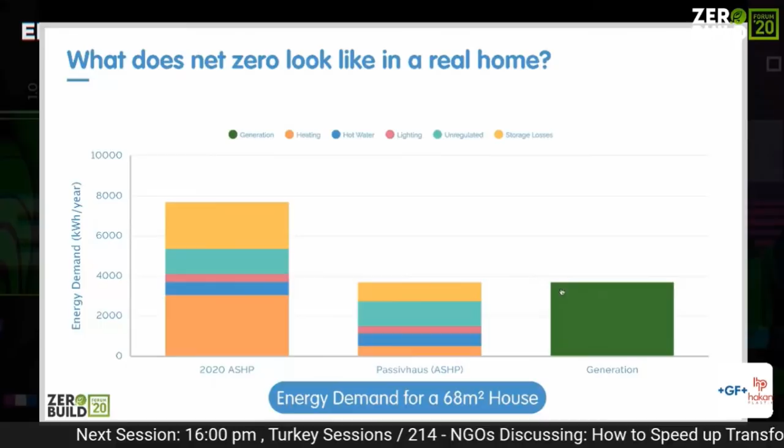So going back to our definition of net zero, that means quite simply that we need to generate that amount of energy in order to get to net zero. So that's simple. But the problem is that to generate that, we need around 14 solar panels. And solar panels take up space. So if we look at how that actually stacks up, you can see that here, the top left are our 14 solar panels. If we put them on a single story, 68 meter square building, everything works fine.

If we make that 2 stories, then it doesn't actually fit. If we make it 3 stories, which is for this size of building apartment, more logical. In fact, it might be 8, 10, 12. You know, the 68 meters squared is just a sort of a 2-bedroom apartment. If we put it on there, then you can see that it doesn't fit at all. So we've got a problem there, haven't we? So what are we trying to do?

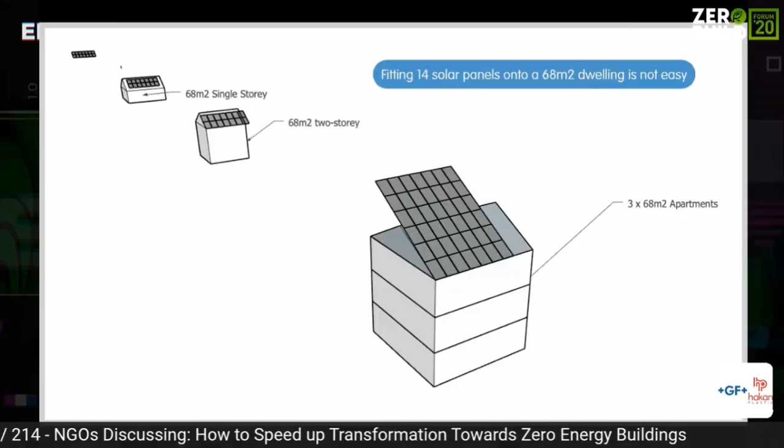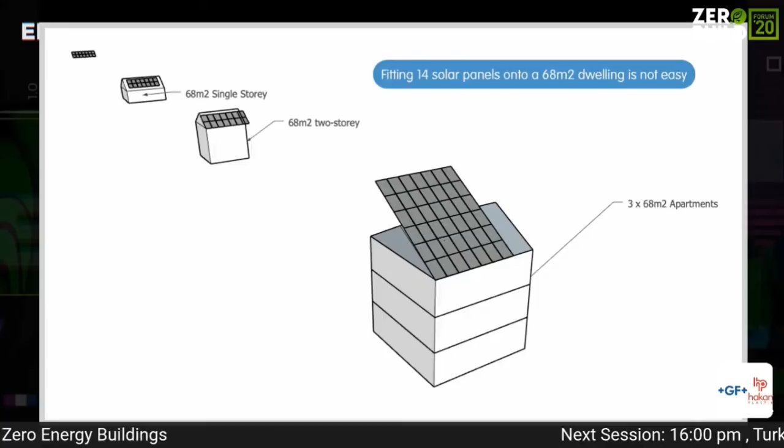So if you remember back to my discussion of form factor, you will recall that this type of building, single story, is really inefficient. Before we even start, it's inefficient. It takes more insulation, more cost to get it to be a highly performing building. Whereas this form factor is much more efficient. So if we force people to build what's actually a net zero building, we actually force them to build inefficiently. If we let people build efficiently, what we need to consider is that, yes, we still need that amount of generation of renewable energy, but perhaps it doesn't necessarily need to go on the building. Perhaps it can be elsewhere.

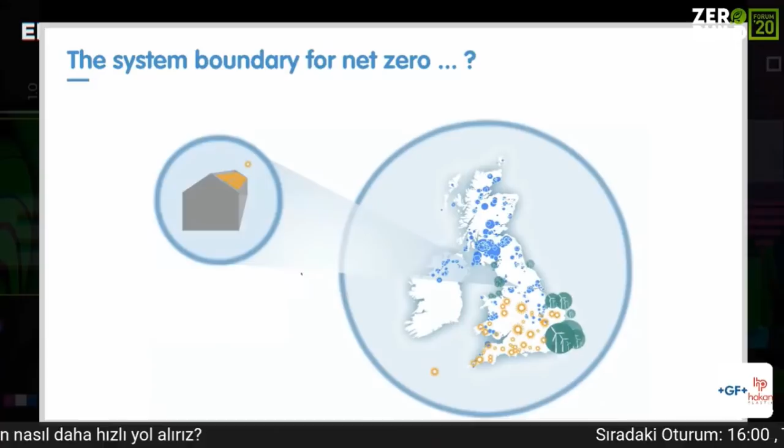And this is all about the system boundary. Do you consider the system boundary around your building? Do you consider it around your development, your site? Do you consider it around your region or country or world, whatever. But the point is that if we try and make every single building net zero, then we force people to build inefficient buildings. Actually, we need to look at the big picture and see if we've got enough renewable energy across our whole scope, and see if that net zero equation works.

It's also when the UK's energy regulations really started to come into building regs significantly. But actually, even the buildings we are building now are not energy efficient enough for what we need to do to get to net zero. And what that means is every building we are building right now will need to be retrofitted before 2050.

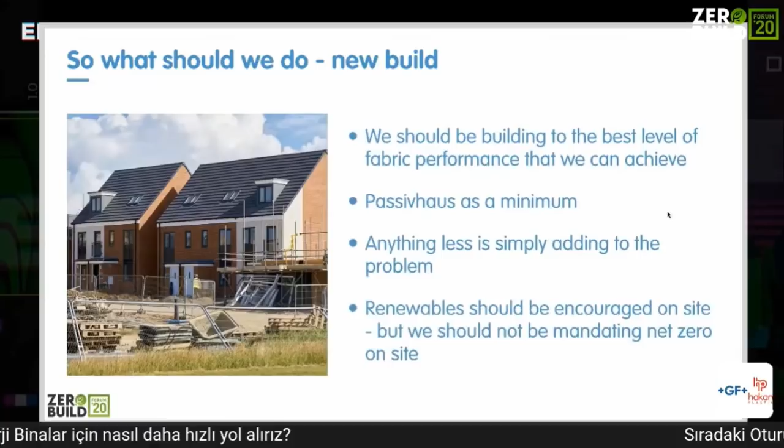So let's go back to our new build versus retrofit. So new build, to be honest, it's very straightforward for me. We know that we probably won't have enough renewable energy unless we get down to very, very efficient levels.

So for a new build, we need to be building as efficiently as we possibly can. Anything less means we're going to have to retrofit that home again before we get to 2050. So as efficient as we can, and renewables should be encouraged, but not mandated, because we need to look at that bigger picture. So that's new build, relatively straightforward.

Retrofit is much more complicated. So when do you intervene in retrofit? Because somebody will own the building and they have a vote. There are risks to retrofit. How much does retrofit cost? Who pays? Are people confident in the tradespeople that come and do it? So it starts to get very complicated. So perhaps we need to look at it in a more nuanced way.

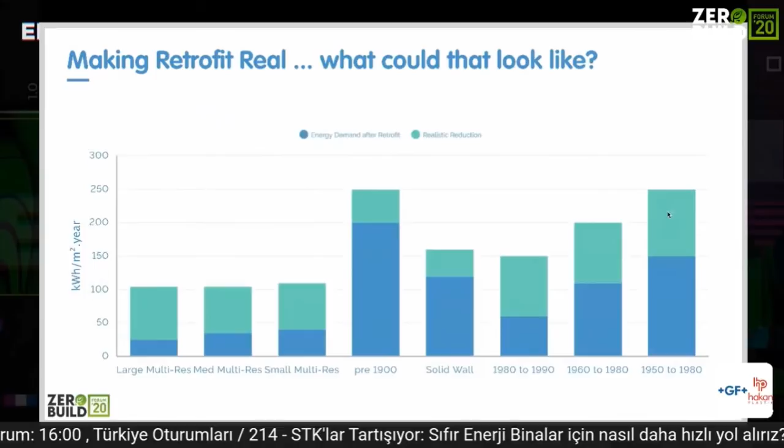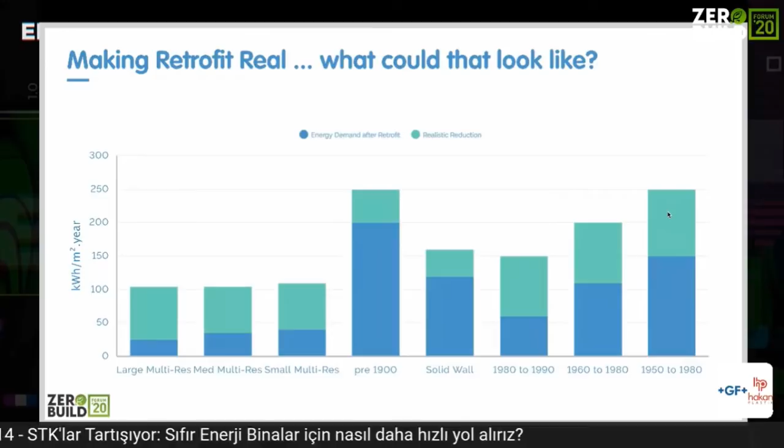So this is some different types of housing we have in the UK. We'd like to know where we are now in terms of what energy our existing buildings use and how much we could save. So perhaps in some of our very old buildings, we can't do that well, but some of the later buildings, we can do a lot better.

So that's perhaps where we should be putting our effort. It also could be that we look at it in the shape of buildings. So should we be looking at the detached buildings or whatever it might be? And should we be looking at shallow retrofits where we just do a little bit of insulation in the attic, in the loft, or should we be looking at a deep retrofit? We don't know, because we need to get to some of this kind of figure where we're looking at how much it costs per building type to save a kilowatt hour.

And what that will do is inform our big picture, which is how far can we reduce our energy demand in the built environment. And then that informs policy at a national scale, which is here's how much renewable energy we are going to need in the future if you do want to get to net zero.

So I've spoken a couple of times about hydrogen. I mentioned, so are there technologies which are going to come along, which mean we don't need to do this energy efficiency thing, because it is difficult. It's not easy. So are we going to get hydrogen boilers coming in and saving the day? Could we have more efficient heat pumps, high temperature heat pumps, things which means we don't have to do energy efficiency, or solar panels which are 5,000% more efficient?

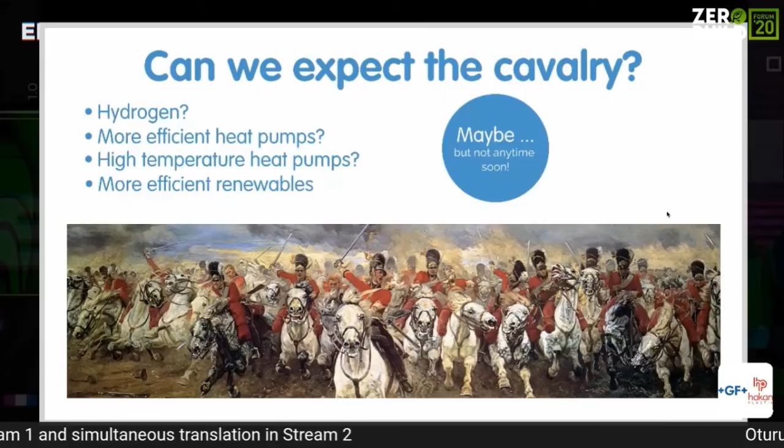Well, lots of these things have been worked on for many years, and the technology is relatively mature. We may see incremental improvements, but I'm not sure we're going to see something that's going to come along and just solve all the problems for us.

In particular, I wanted to mention hydrogen. I know we've only got a few minutes left now, but what I wanted to show here is that there are various supposed forms of hydrogen, and the only true green or CO2-free hydrogen is green hydrogen, and that's hydrogen which is produced from electrolysis. So we use renewable electricity generated from renewable sources to produce hydrogen. Everything else results in CO2 emissions, which either go into the atmosphere or have to be captured and stored, and we can't do that at scale yet.

And the investment to be able to do that at scale is massive. If we just look on the right here, you can see that if we start off with our renewable energy, which we're generating, and the first option is we put it through a grid to people's homes, and we combine that with a heat pump, and that gives us a multiplier. So if we start off with 100 kilowatt hours, we're going to end up with 270 kilowatt hours. So it's a 270% efficient process, depending obviously on your type of heat pump.

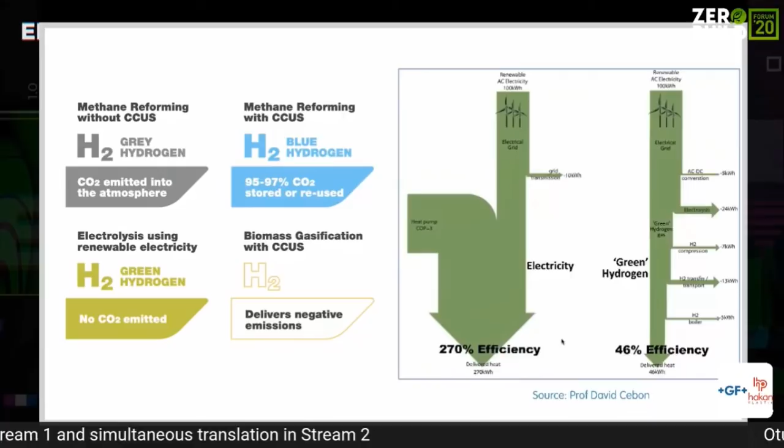Alternatively, we can take that same 100 kilowatt hours of electricity and convert it to AC to DC. We can then use some electrolysis to produce hydrogen. We then store, compress, and transport the hydrogen, and at each stage, there are losses. By the time we put that through our hydrogen boiler in someone's home, we're down to 46 kilowatt hours. So what that means is, remember I spoke earlier about the fact that we probably haven't got enough renewable energy already, and this is kind of based on the electricity, the heat pump scenario.

If we use hydrogen, we need 5 to 6 times more renewable energy to start with, which is just not feasible. And that's why this particular scenario shows a very small amount of hydrogen, for very hard to treat homes which we can't get the energy demand out of, homes which are off grid.

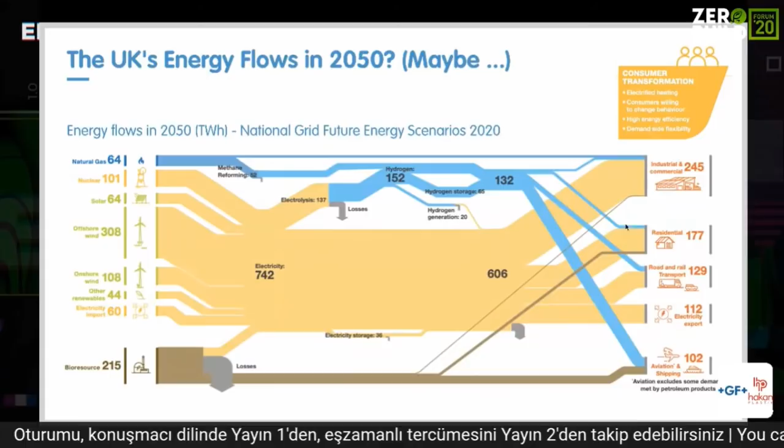The vast majority are on electrical supplies. So hydrogen is really going to be needed, as this diagram shows, where we really need that high power to weight ratio in aviation, shipping and transport. That's where hydrogen is going to come in.

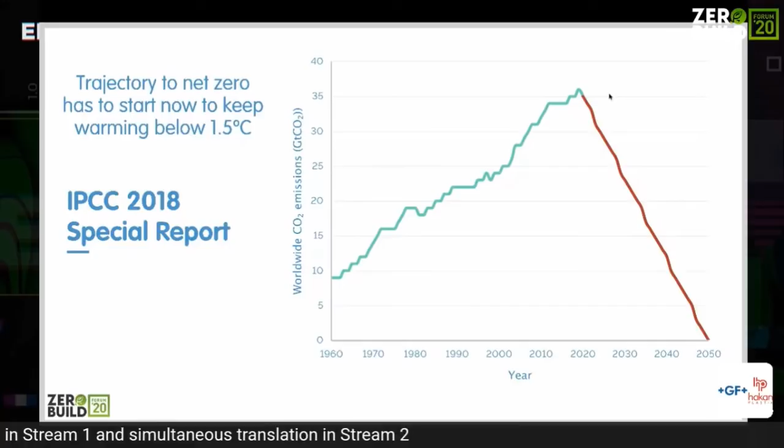It really brings me back to my initial diagram, that we can't afford to wait. We need to start right now, we need to start moving this down. We can't wait for hydrogen to come along in 10 years time and then find out it's not going to work. Energy efficiency is a no regrets measure, which means that we are able to do it now, and it will have a significantly positive impact in all possible scenarios.

So thank you very much. That concludes my presentation, and I believe now we are opening up to see if anybody has any questions.

Okay, it's really nice. I would like to thank John for this truly informative presentation. I'm very happy because it's with an engineering approach. It's good to give some information - what can we do and what is the reality? It's okay.